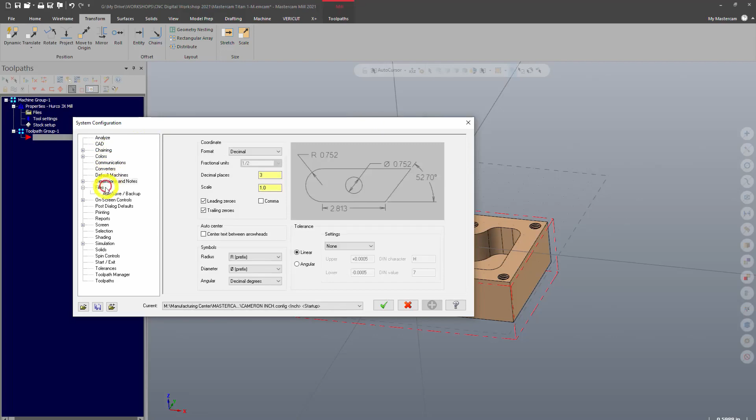Everything else here in the configuration is another video topic, but it really just allows you to optimize your workflow and customize what you're doing.

So with our part here, we're ready to start making some toolpaths. Coming from a machinist perspective, once again, we have to think, how are we going to machine this? And the first operation is always going to be face milling.

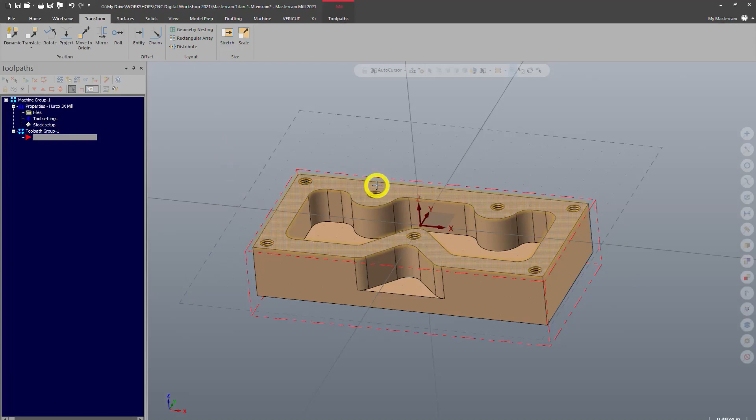Face milling is when you drag a tool across the face of the part, cutting the top and creating a nice smooth face. I generally recommend that you always face your parts first, that way you have a nice reference that you're starting from and everything is flat.

To do facing, there's a number of ways you can do it, but the most basic is going into our toolpaths. So from now on, we're going to be working in the toolpaths tab. We've got a lot of toolpaths here.

Multi-axis is going to be for 5-axis type work. 3D is going to be used for surfacing stuff. We're not going to dive into that with this series, so all we're going to focus on are these basic two-dimensional toolpaths. You've got a lot of them here, and again, we're not going to be touching most of these. We're just going to be using the basics.

So basic here is face. We'll go ahead and click face. That's going to ask us to enter an NC name. Whatever it says is fine. Go ahead and click OK.

Now, the way a toolpath works in Mastercam is you select which toolpath you want, and then you tell it where you want it to cut. So this is telling it where we want to cut. This is called the chaining dialog window here, and this is how I select geometry that I want Mastercam to cut.

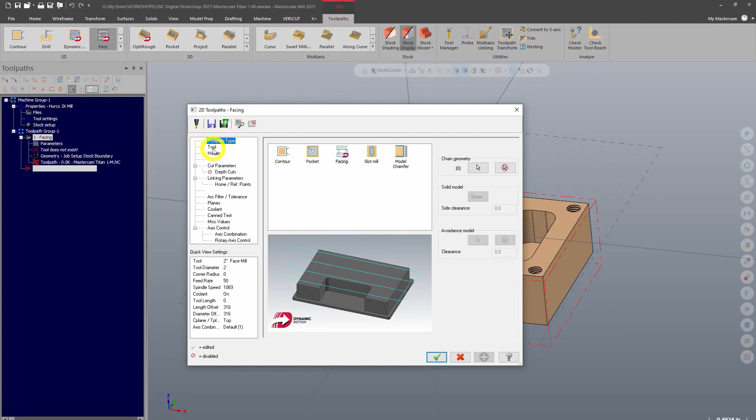The first step is always going to be selecting a tool. I'll go ahead and click Tool, and select Library Tool because I don't have any tools here that I've used. I need to go into my tool library. So I'll select Library Tool and open the library that you are all using. This is the default tool library that I just opened.

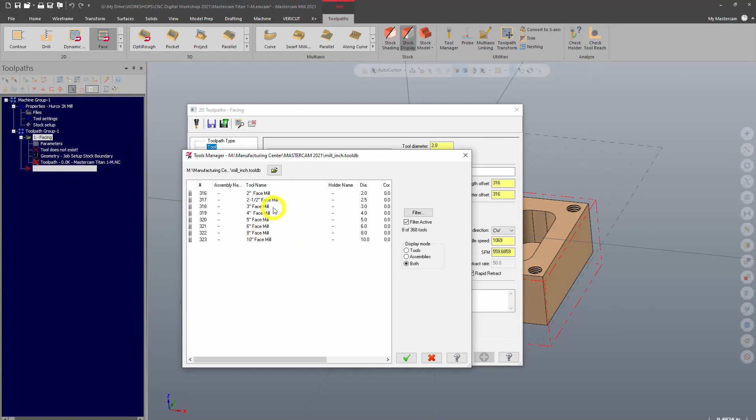Yours is already set to that. And it automatically filtered tools to be face mills. If it didn't do that, if my filter was off, you can see all these tools, and there are 368 of them. So that's pretty hard to sort through.

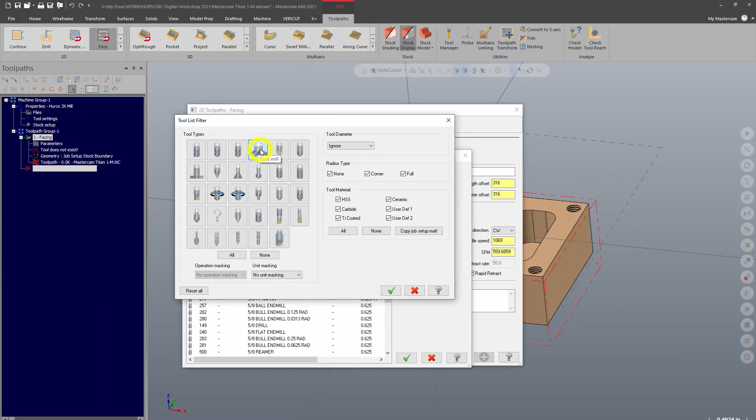So if I go in and filter, I can filter tools by tool type. Right now it's selected on face mill. If yours comes in like this, it's selected all of them. If I single click these, that's just going to remove those from the filter, so it's not going to bring those up. And if I want to quickly remove all of them, I can double click.

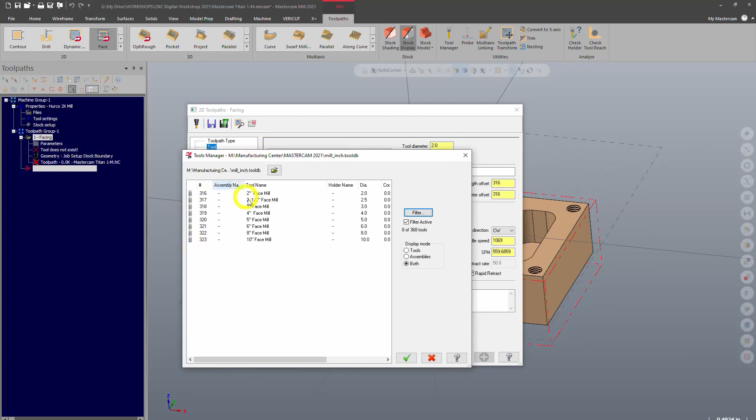Say taper mill - if I double click end mill, it's only going to show me end mills. And if I double click face mill, it's only going to show me face mills. So in our shop, typical face mill is 2-inch diameter. I'll go ahead and select that.

Alright, and again, as I've mentioned, most of these parameters you're not going to actually have to mess with, but I will cover these really quick.

Here we have the speeds and feeds of that tool. This is where you edit the spindle speed and how fast the tool is feeding. For this demonstration, we're not going to mess with that, but know that when you actually set this up to run on a machine, these parameters are very important. If you bring me a program you've written, I'll probably modify speeds and feeds to adapt them to our tools and machine. So for now, we'll just ignore them.

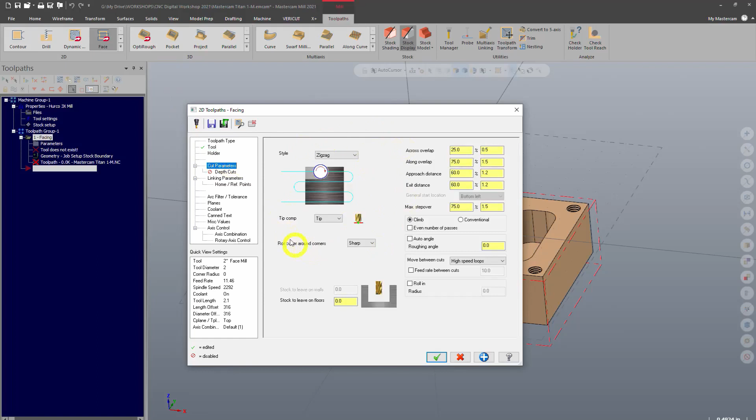So we'll have our 2-inch face mill. Cut parameters are where you tell it how to cut. The style of cut is going to be zigzag, going back and forth. These step overs, you don't have to mess with those right now. I have these set to defaults, but yours might look different, so don't worry about that. What we want to make sure is that the move between cuts is on high-speed loops.

The reason for that is, if it's not on high-speed loops, you won't get this nice smooth rolling action—it'll be more abrupt. So make sure it's at zigzag and high-speed loops. Another thing is you want to make sure it's not leaving any stock, so stock to leave on the floor should be set to 0, because we want this to not leave any stock on the floor.

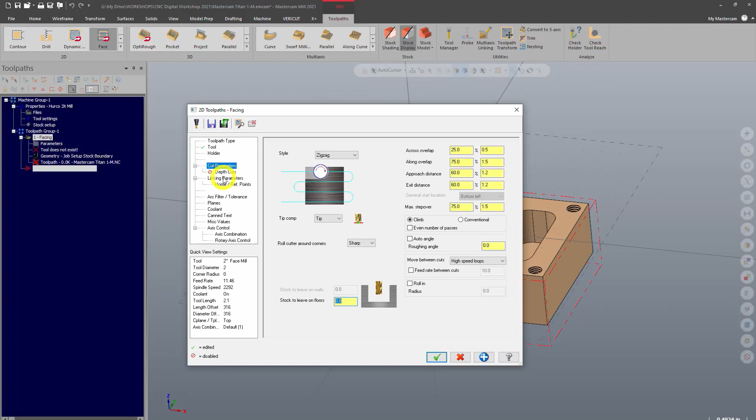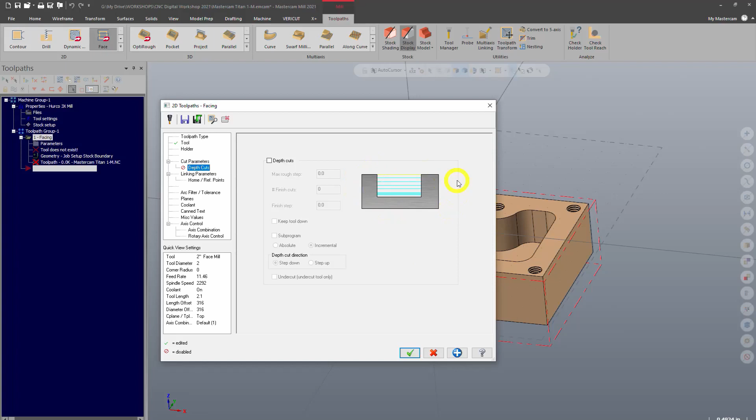Depth cuts we're not going to worry about right now. Final step is linking parameters—this is where you tell it how deep to cut. A lot of times students think depth cuts is where you tell the machine how deep to cut, but depth cuts is actually something totally different. It's splitting up the amount of cutting into multiple steps, as you can see by this graphic. So if you have a lot of material to take off and your tool can't take it all at once, you'd use depth cuts to split the cutting into several layers or slices.

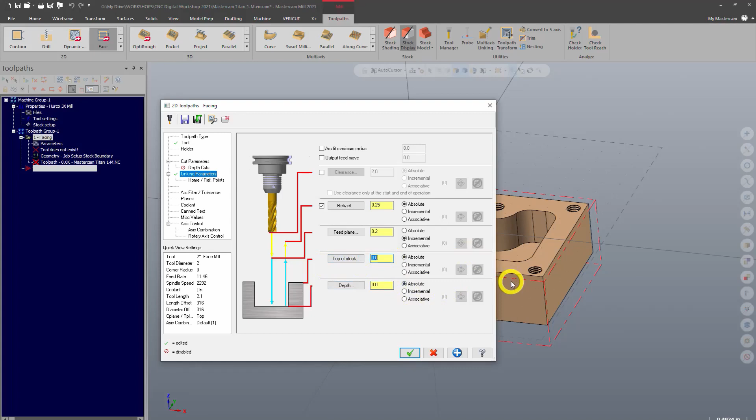This is where you actually tell it how deep you want your cut to be. So I could say -1 inch if I wanted to cut 1 inch down into the part. Because we're just going to face off the top on a basic skim cut, we'll set that to 0, and make sure the top of stock is also set to 0. So really that's it—we're good to go. We'll click OK.

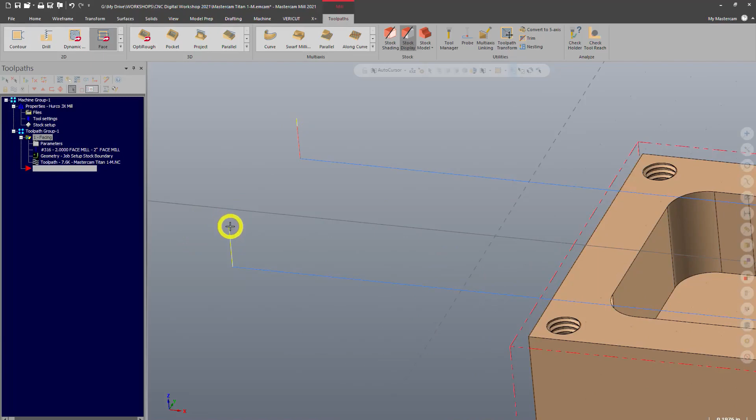Now you'll see our toolpath has been created. The toolpath is denoted by these blue lines—blue indicates feeding motion, and the yellows and reds indicate other types of motion. These are rapid moves, basically the machine getting from point A to point B as fast as possible. So the tool rapids down, feeds across and back, then rapids up, and that's it.

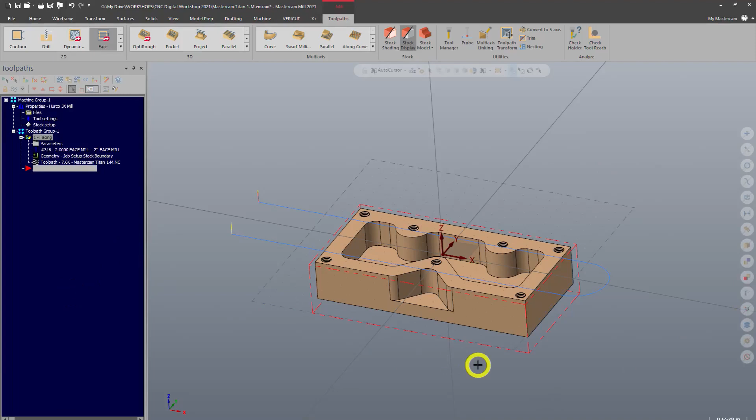Now if you're feeling extra confident, you could run this, throw it on the machine, and press go. I don't like to do that—that's risky, and you always want to do two-step verification on these. So we have two methods of verification. The first is called Backplot. To do a backplot, go up to the Toolpath Manager, and hovering over these icons will tell you what they do. Our two verification styles here are Backplot and Verify.

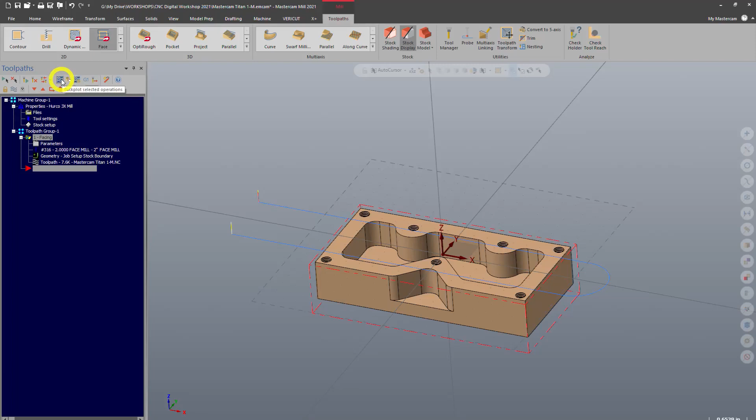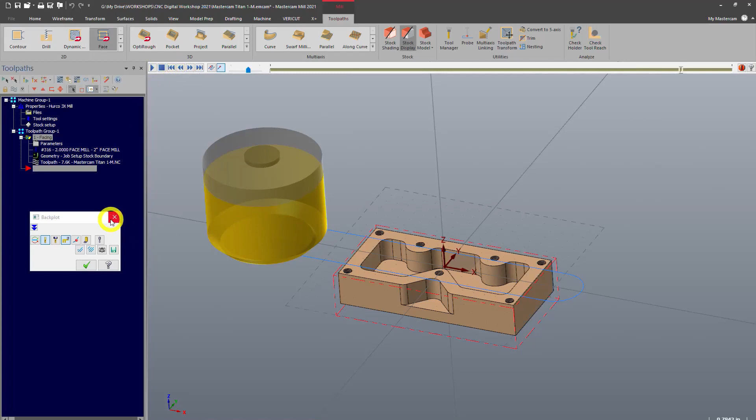We'll start with Backplot—I'll single left click Backplot. That brings up our tool, and I can play through here; you can see the motion. I can also click S to step through, or S or B to step through my part. That looks good—it's just running a face tool over the top of the part, so we're good to go. We know that's what we wanted.

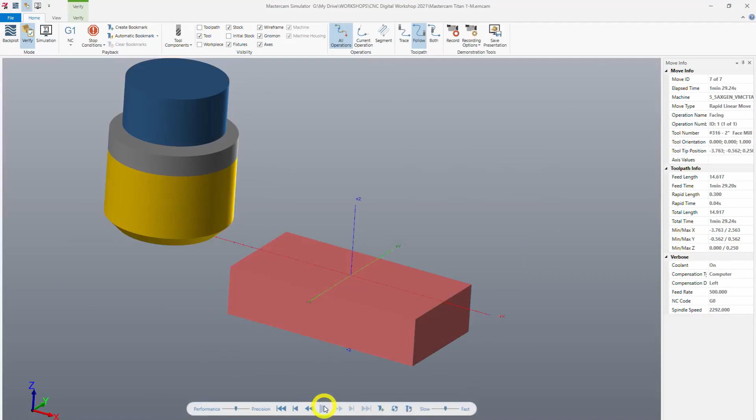Now the second type of verify is using the verify function. We run it through verify here, which pulls up a new window. You can see the stock model there, and if I play through, it runs over the top—it didn't actually cut anything in the simulator because the stock is exactly where the tool is, so it's not removing any material here, but it will on the machine. Alright, so that's basic facing.